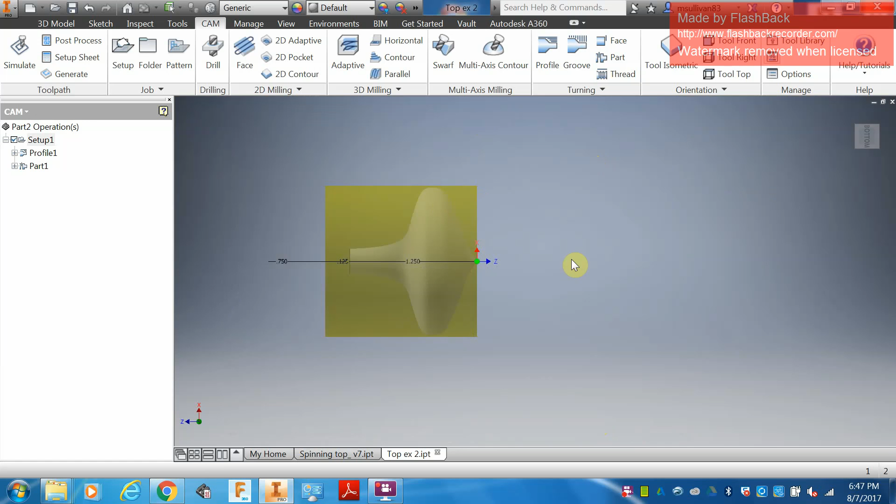Alright, so when you start an Inventor, you always want to start with an IPT, even if you're going to work in multiple different functions within Inventor. So start with an IPT, make sure you're in inches in English mode, and go ahead and create a new part. We're going to go ahead and make a top, and you can kind of see the top I previously made in there. We're just going to start from scratch.

From here, what we're going to do is we're going to revolve a sketch. We're going to start with a 2D sketch, go to Origin, and I'm a big fan of sketching on the YZ plane whenever we're sketching these parts out for Fusion and Inventor.

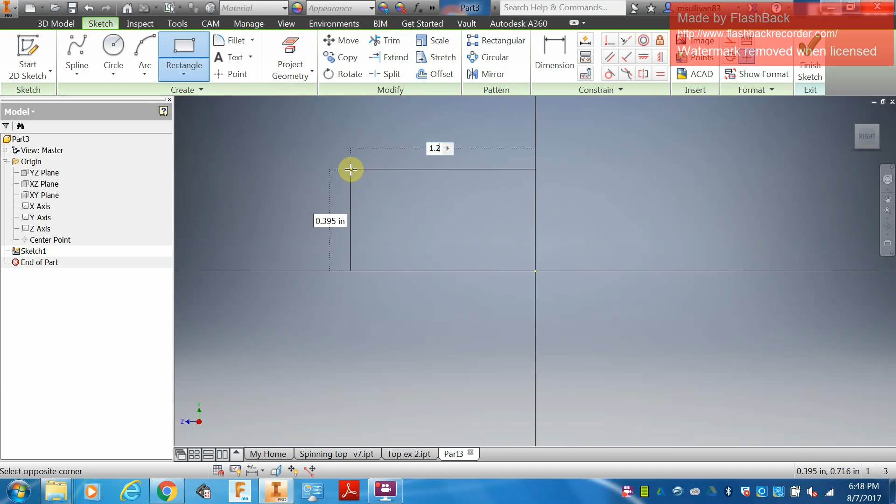If we go ahead and start the sketch, I would make the top — I'd make it right around 1.25 or 1.375, because the material we have is 1.5 inches. Then I will go 0.75 here, so 1.25 by 0.75 should be a pretty good sized rectangle to fit your top into. Click again, and in this area we're going to do our sketch.

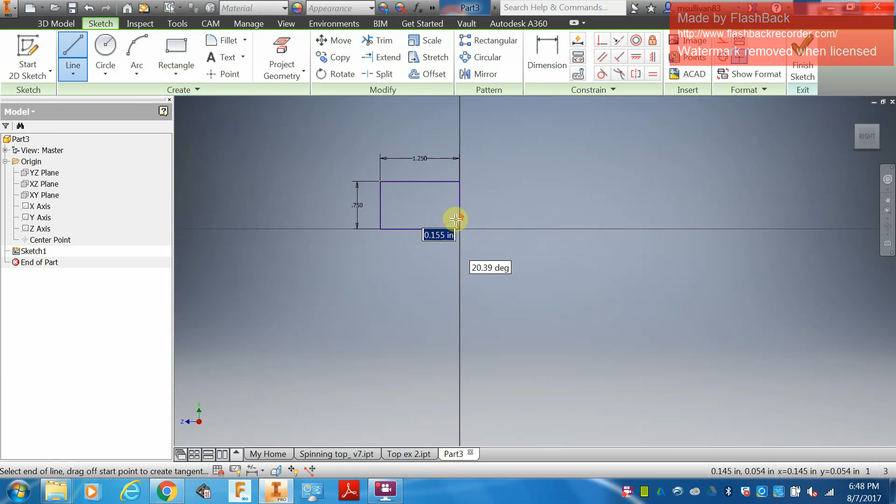One thing we found is if you start with a simple line, making something like a square or angled line in the beginning makes the rest of the project go pretty easy. So start with a nice line here, and then go over to the spline tool, so you have something that's going to revolve around, and you have a nice point where you can create an axis.

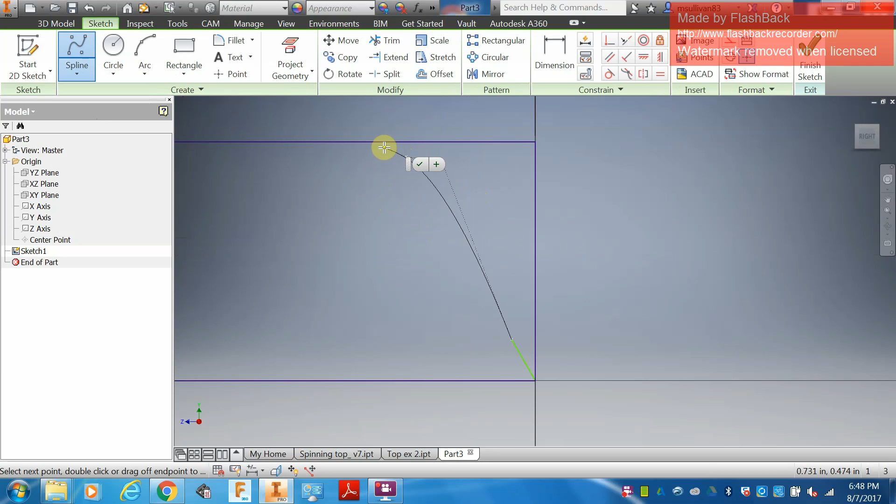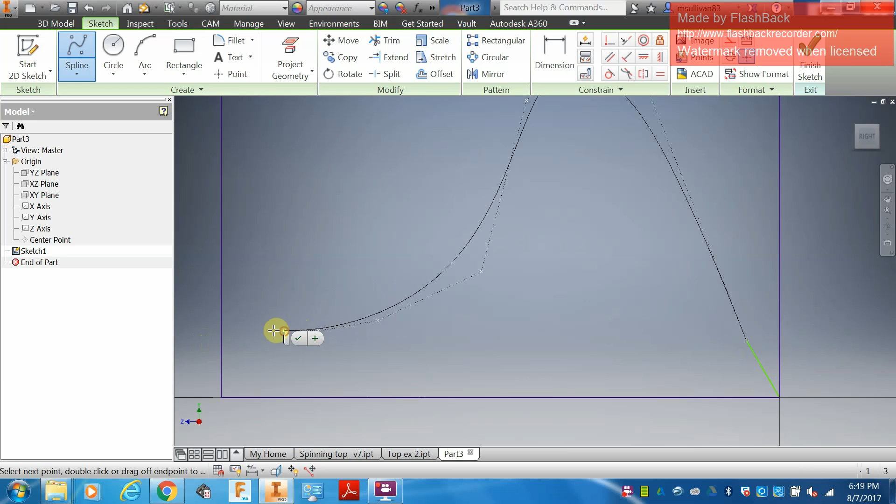You need to stay within the bounding box here, and you're going around. We can kind of edit this around, but one of my only complaints in Inventor is this spline tool. I'm going to go a little bit outside of the box, but not completely, just so I can dimension this last point. You can always just kind of make it more curving, but you have to hit that green check mark to make it work.

Now up here, you can always just move around these points a little bit, but don't do anything too crazy — just move them a little bit so you can kind of keep the profile, but it has to stay within that line. Then you can come up here to trim, and you should be able to trim up that little bit, so you have a little point you can measure.

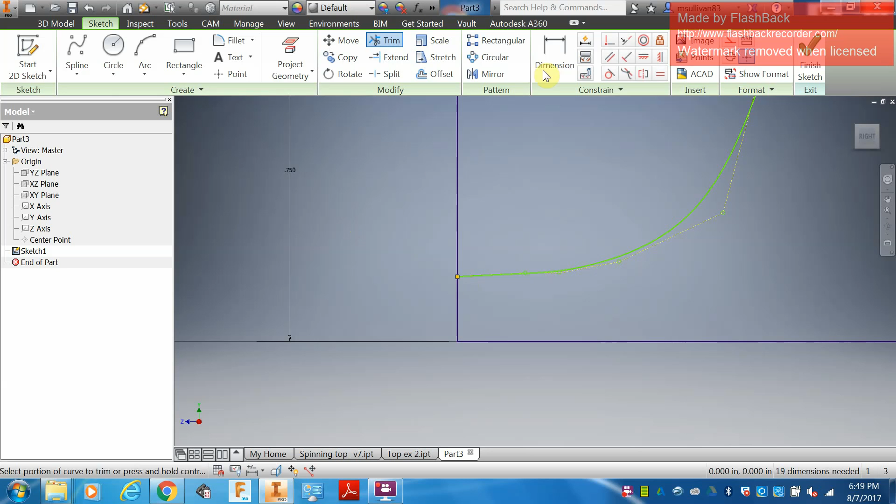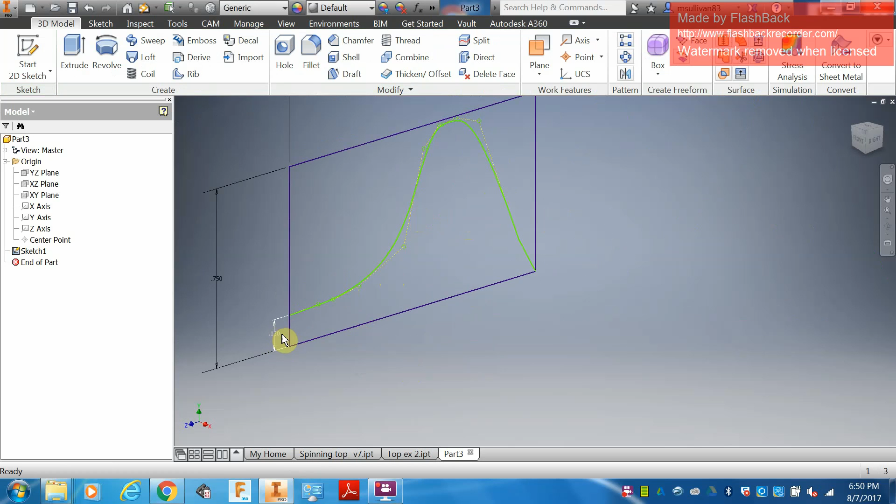This decimal point here, from here to here, has to be bigger than 0.125. So I would say like 0.13, or 0.125 I meant. If you go 0.13, that's bigger than 0.125, and that should be enough material there so the part doesn't break when you machine it. 0.125 is the very bare minimum that I would recommend machining down to. If you go down to 0.1 or anything under 0.1, you're probably going to have a higher failure rate.

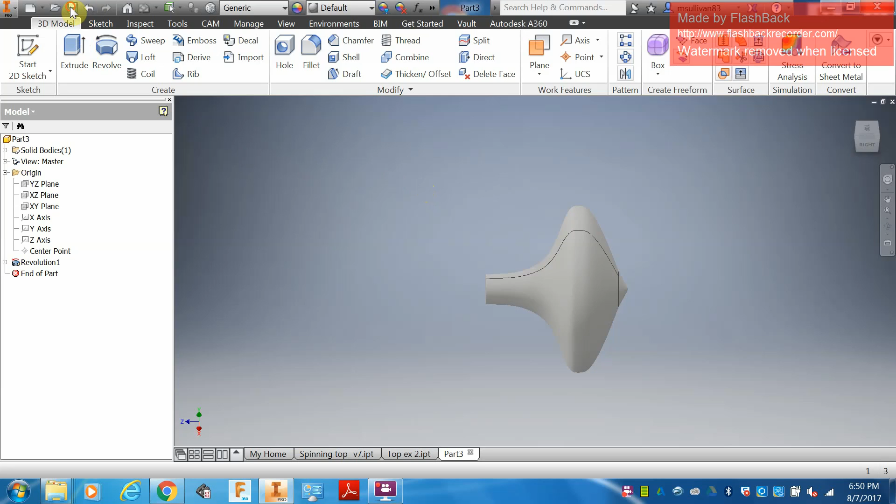So you're going to go to revolve. You're going to revolve this around this axis, and now you have something that looks kind of like a top. You're going to select OK, and you are going to go ahead and save your part — you can hit Control S or hit the save button up here, there's a lot of different options. You're going to call it spinning top, put your name in there, and you will be ready to begin the next portion of the project.

Just remember to try and get a good sweeping flow down the backside of the part.